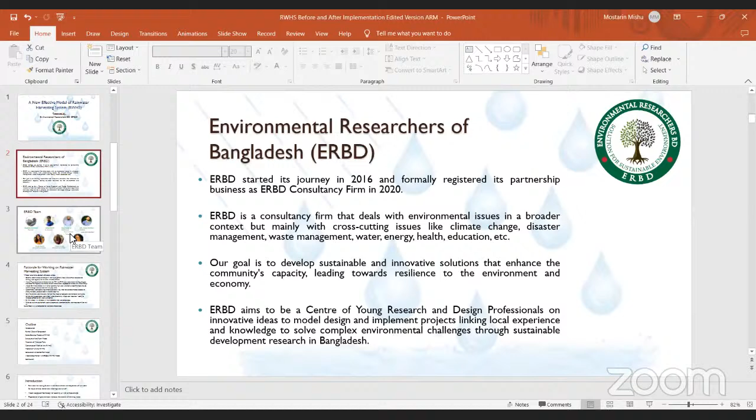We are working with 7 core members here. So if Makam can introduce ourselves, our group members, and say something about the ERBD platform.

Thank you so much, Atik Bhai, for giving me the floor. Good afternoon everyone, this is Makame Mahmood. I'm the founder of Environmental Researchers BD, a knowledge sharing platform and consultancy group. As my colleague Atik Malik Bhai said, we did a rainwater harvesting model with CCDB a few years ago. Apart from that, we have a much bigger network, 3.7K members in our Facebook group, and a global networking chat group where 250 people are connected on this platform, with various professionals from expert level, mid level, and also practitioners connected there. Our website is ongoing, and hopefully we'll launch it in the upcoming year.

And also in our group, we share a lot of insight about environment and climate change. We share articles, blogs, opportunity events, and lots of things. We started our journey in 2016, and during that time we did a few innovative projects.

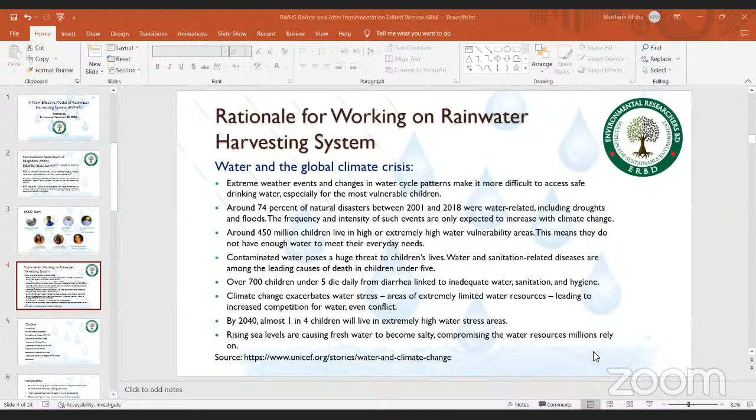Sir, just a moment, can we have it full screen? It's showing like... it's full, it's not full screen yet. Jaman, can you give it full screen and slideshow mode? I think I can also share from my side. Yes, please proceed, Bakam. That will be better. Can everyone see the full screen? Not I yet, I think he doesn't have it yet. Need to stop first. Yeah Jaman, if you can continue. This is nice I guess. Sir, yes, fine, in full screen.

Yes, I'm hearing. Thanks a lot, please, for giving me the opportunity. And I would like to invite all of you in our presentation. I am working as a co-founder of Environmental Researchers BD team, and my name is Jaman Sharif.

So I'm going to explain our model, especially this model, a rainwater harvesting system for multiple uses or multi-purpose uses. We have actually constructed or established several rainwater harvesting models for different purposes, and this was our first work. It was completed in 2016, and because of being a multiple purpose project, it was chosen by one of the leading NGOs, INGOs, CCDB, that means Christian Commission for Development in Bangladesh, and it was established in their climate technology park.

So I would like to first describe a little bit about the rationale for working on the rainwater harvesting system, particularly this model. Actually, we can say water is life, or life is water - water is the most essential part of life and being healthy. Over 700 children under 5 die daily because of diarrhea and cholera-related diseases, that means water-related diseases. In Bangladesh, in the south region, the coastal region, we face a severe drinking water crisis, because most of the water in the coastal region is salty. That's why we came together to establish a model to improve, actually not to create a new idea, but to improve existing ideas.

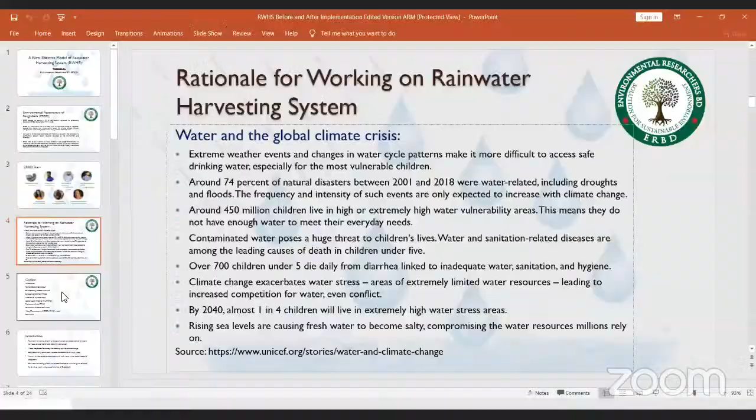I think there's some technical problem. Yes. Okay, yeah, here you go.

So actually, I will cover all these issues in my presentation. At first, some rainfall data, some existing models. I will then describe our model and the filtration materials we are using. I will share some photos of the construction of this model and how it actually works, the mechanism of this model, and some calculations showing how this model will serve the purposes of drinking water and small scale irrigation for a family of 4 to 5 people. Then a video documentary of this model will be presented.

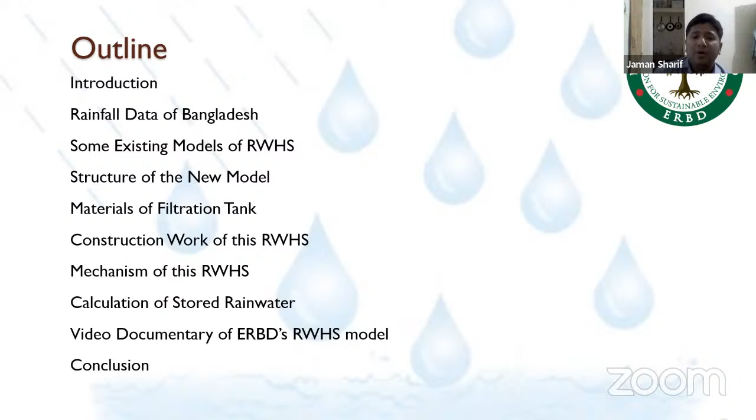Okay, so I have told a little bit about this. Actually, it is rainwater harvesting. We all know about these models. It is the accumulation and deposition of rainwater for reusing it rather than allowing it to run off. That means we store the rainwater and use it for future potable uses like drinking and cooking. This model is especially established for the people of the coastal region of Bangladesh.

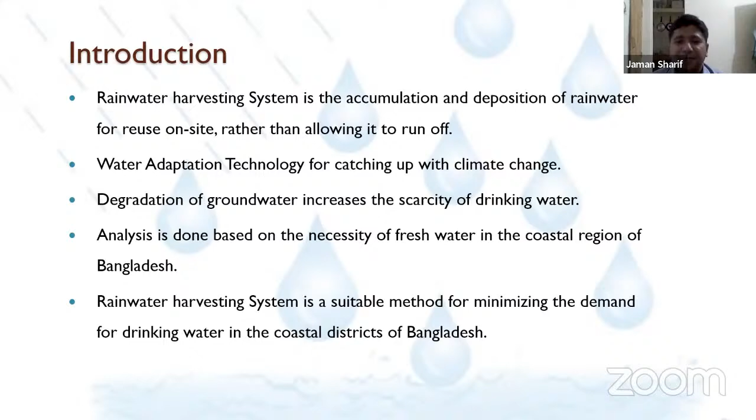Okay, we can go to the next slide. So the rainfall data of Bangladesh shows that the northeastern part, that means the Sylhet region, beside the Meghalaya and Assam region of India, has the highest rainfall, about 5,000 plus millimeters per year.

So in that region, the rainwater harvesting model would not be as effective as it should be in the southern part of Bangladesh, that means in Noakhali, Bagerhat, or Shatkhira regions. And though the Chittagong Hill Tracts regions are beside the coastal regions, due to being highlands and hilly, they have moderate rainfall, more than 3,000 millimeters per year.

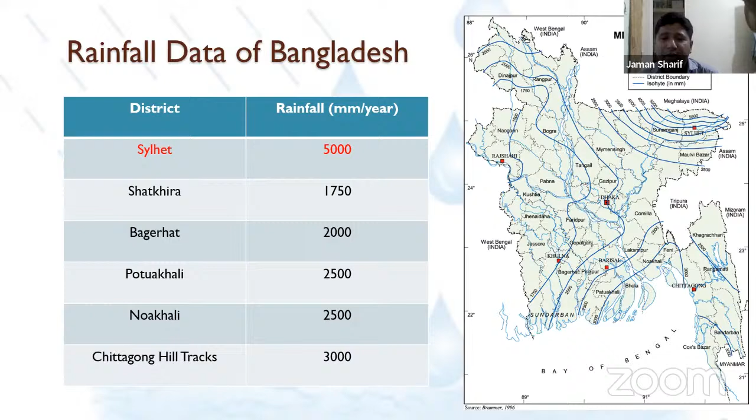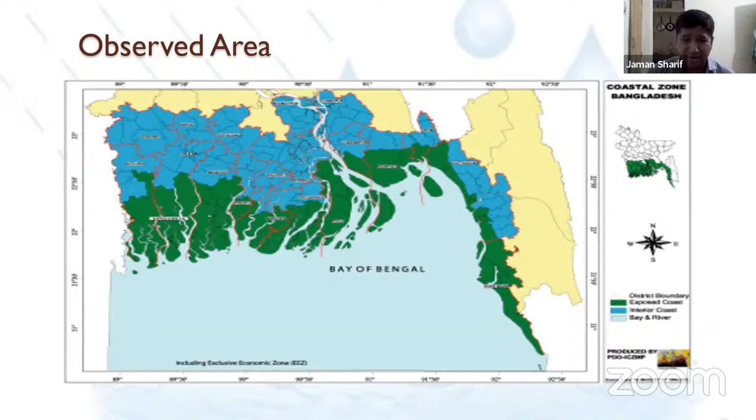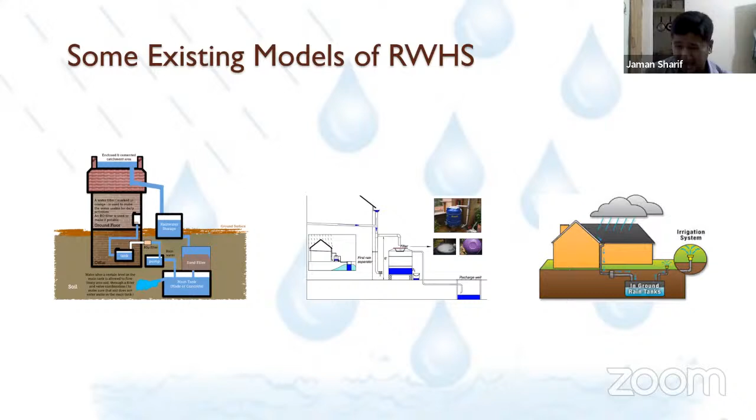In the second model, we can see that the water is being captured through the catchment and stored in a filtration chamber and also in the reserve tank. This is quite a suitable model, and it can be established in Bangladesh as well. In the third model, we can see that this also works in the same way.

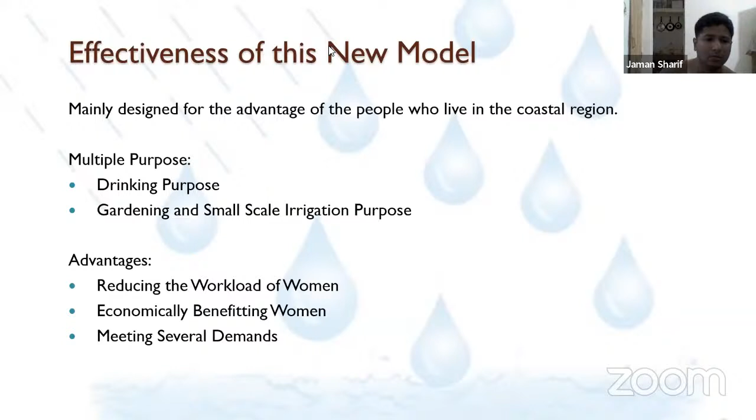We can go forward. Makam, are you there? Hello? Someone carry on. Okay, hello? We can hear you. Please carry on. Okay, okay, go to the next slide.

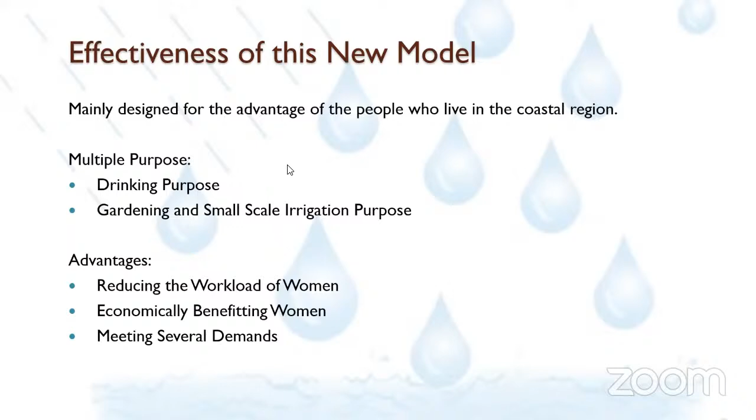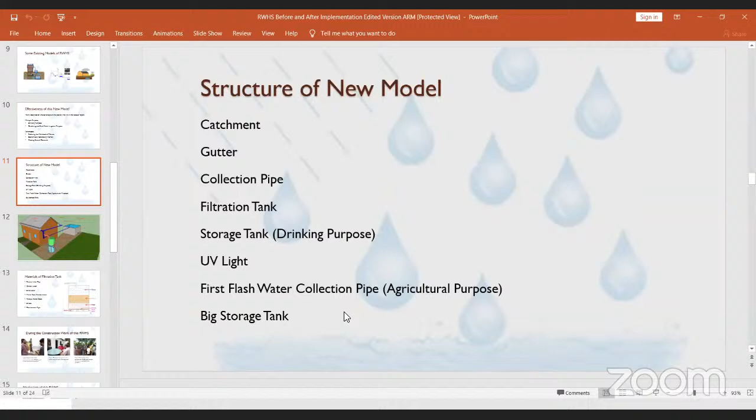Okay, so actually this model has some components: catchment, gutter, collection pipe, filtration tank, storage tank, UV light facility, first flush water collection pipe, and big storage tank.

We can see that the water is captured at first in the catchment area, and through the gutter it comes to the collection pipe, and at first it goes to the filtration tank. After being filtered, it goes to the storage tank, and we can collect the water through taps, and there is also an outlet pipe system. The big storage tank is used for storing rainwater for irrigation purposes. When the water is captured on the catchment and flows through the gutter, it goes to the big storage tank automatically because of gravitational forces.

At the same time, when the pipe toward the big storage tank becomes full, it comes automatically to the filtration tank, and that is how this model works. The capacity of the tank is about 17,000 liters, so in a rainy season we can use it up to 4 times, meaning we can get more than 60,000 liters of water for small scale irrigation purposes, and 5 to 6,000 liters of water for drinking purposes.

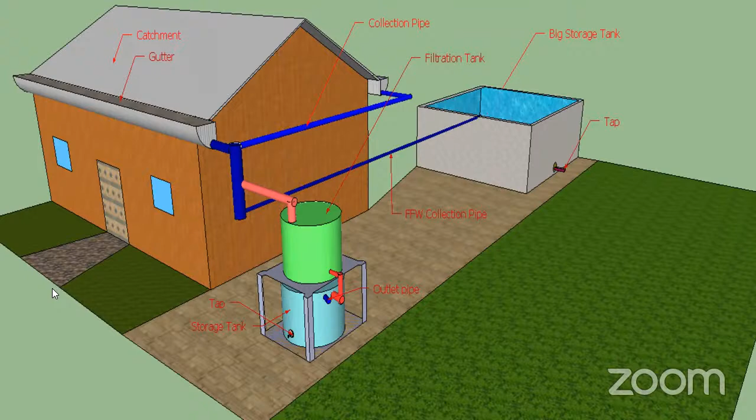Now the mechanism of the filtration tank. In the upper side, you can see the water will come first into the filtration chamber, and we'll use a porous inlet cap so that the water cannot directly come inside the filtration tank. Because we are using gravel or sand layers in this model, a bacterial layer will form here that will consume or eat the organic wastes. That is why it is important to use a porous inlet cap.

We have used traditional filtration materials like gravels and sands here. For supporting the filtration materials, we will use a porous hard sheet. There will be some pores so that the water can pass through, but not the sand. A micro fiber filtrate sheet will be used here to protect the sand from passing through the outlet pipes. And we will use some...

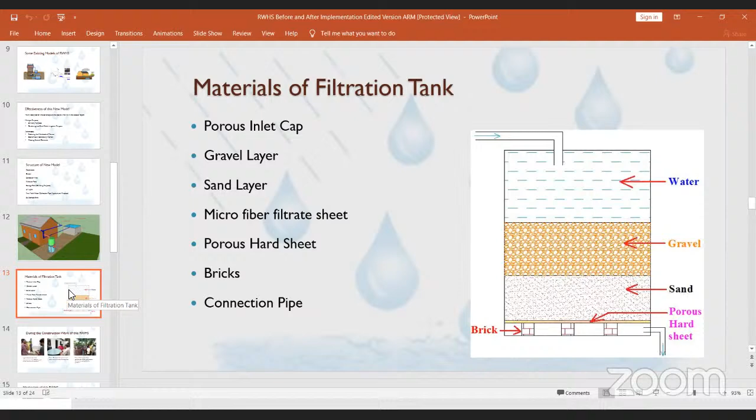Here are some snapshots we took during our construction work. In the second picture, I am explaining that the members are cutting the supporting porous hard sheet. In the third picture, I am explaining to the plumbers about the construction work and the mechanism of how it will work.

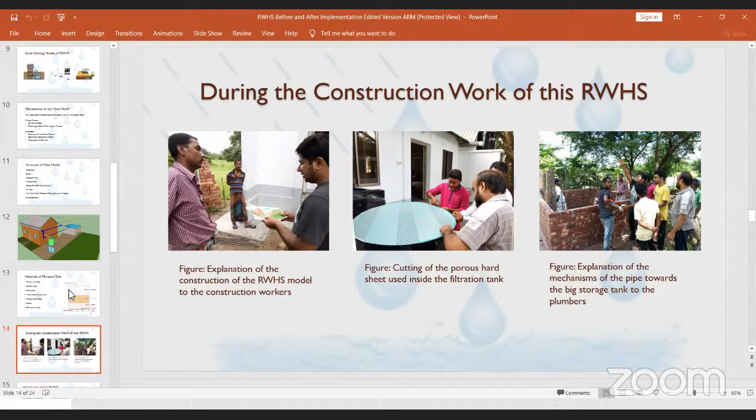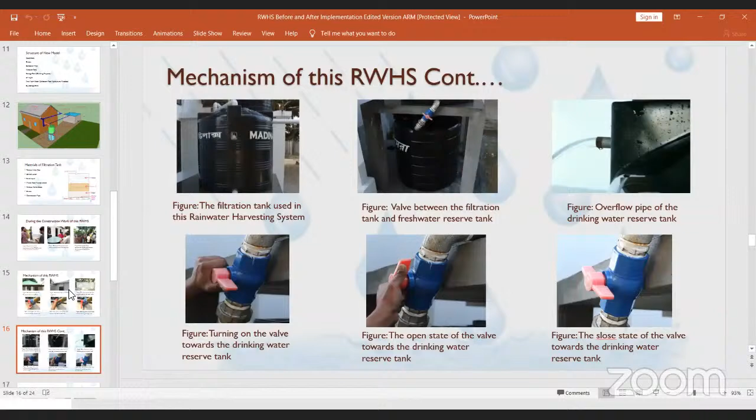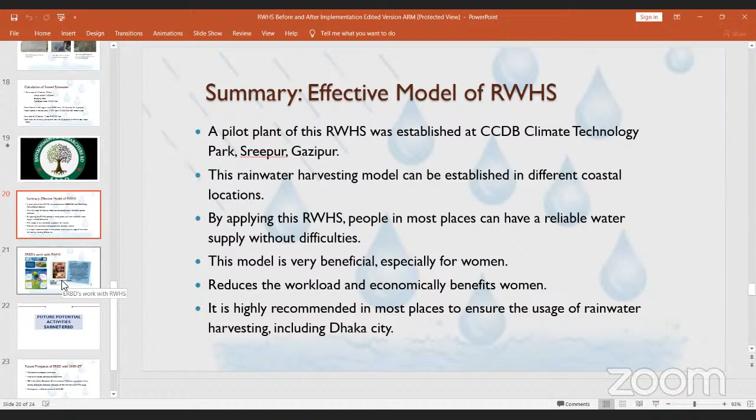This pilot plant was established in the CCDB Climate Technology Park of Sreepur, Gazipur, funded by a German INGO. This rainwater harvesting model can be established in different coastal locations and other areas with drinking water scarcity, like the hill tracts. It can also be used in Southeast Asia or other Asian countries. This model is specially designed for women because it reduces their workload and can be economically beneficial for them. So these were from our side, and we presented a rainwater harvesting model. Thank you, I can carry on from there.

Jaman, I think there are some technical issues. I think this slide Atik Bhai can present. I think Atik Bhai is not available at this moment. I'm not sure, but I think... Hello, Jaman, can you hear me? As he is outside the city and in a very remote area, maybe there are some technical issues. Then Jaman, you carry on, please. Okay, can you please mute? I can carry on here. Okay, Jaman, please mute. Okay. Atik Bhai, please carry on. Atik Bhai, you may carry on. I think they are facing some technical network issue, an internet issue. So let me...

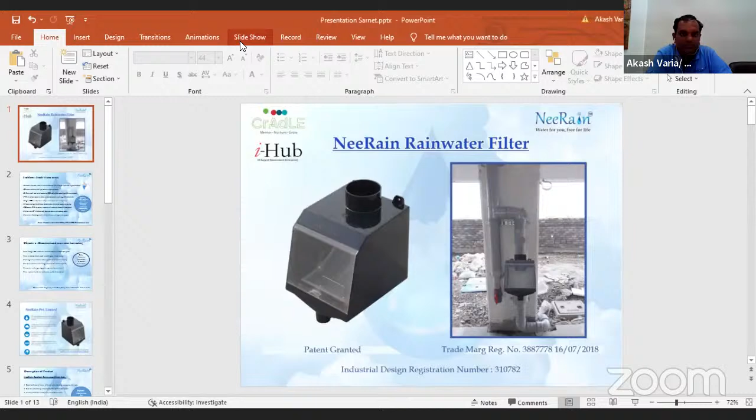Yes, can you make me co-host so that I can share my screen? Dhanushi? Hope you can share. Yes sir, we can see your screen. Yes, yeah sure. Welcome, yes, to Sony. And you can hear also, right? Yes sir, we can hear you well. Yeah, thank you. Should I start? Yes sir, you can start your presentation.

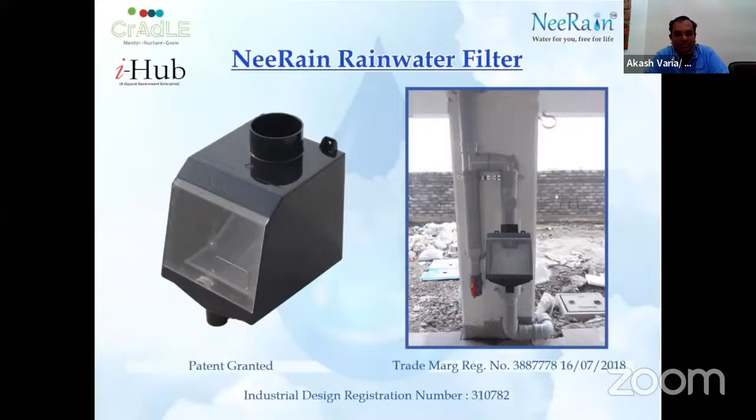Okay, welcome to the world of rainpreneurs from Asia's network. We are all the empowerers and ambassadors of saving the rain, which is the most precious resource of the earth - water. It is our responsibility to ensure no stone is left untouched where we can save rainwater. Let us directly come to the problem of the water crisis in India, as we are based in India. So I will present the data for India.

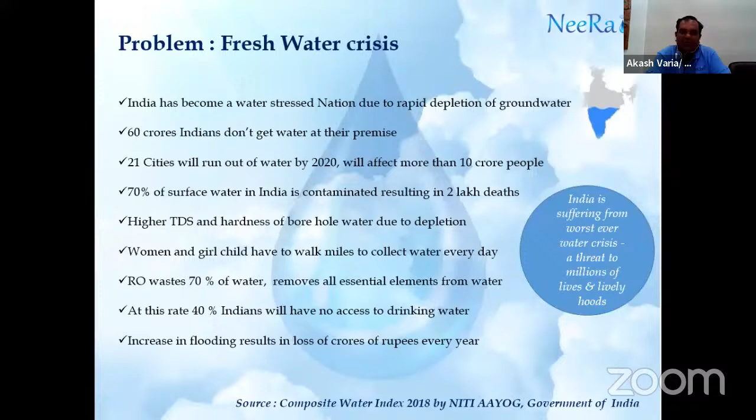Rapidly, it can be said that 60 crores of Indians don't get water in their premises. Even more, like women and children, will face problems in future just because they are not getting fresh water for drinking. Rain is the only solution we have - only rainwater has the answer. Rain brings 450 crores of liters of fresh water to India per year, and each rainfall gives fresh water. Recharge of rainwater solves the problem of water scarcity, and the use of rainwater saves huge amounts of electricity bills. Rain is pure, fresh, and soft with all the vitamins, so we can save the health of children as well as women.

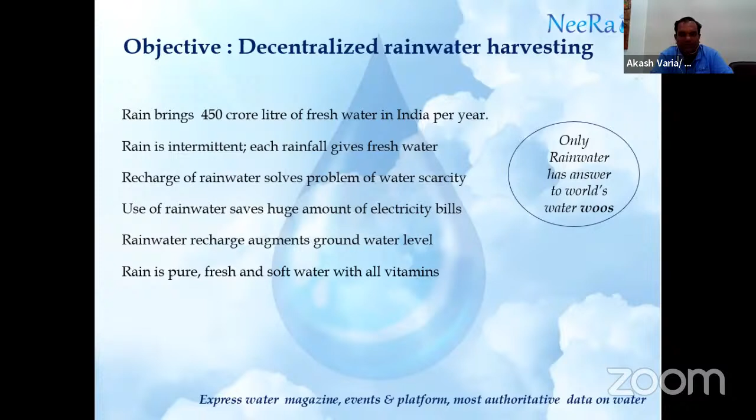So what is the need we found? The meaning of the need is water, and the rain is the water. We founded this in 2018, and the challenge in front of us was that we should provide water security. A common man of India should also be water secure, and they can also use the same rainwater. So we have to make the device as simple as possible, so a common man can also operate it, and cost effective as well.

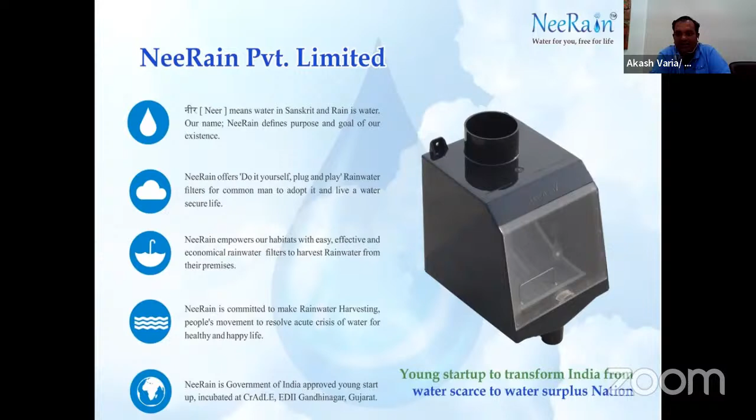So what is the NeeRain rooftop rainwater filter all about? It saves millions of liters of fresh, soft, and pure rainwater over a lifetime. It can be installed by a local plumber within 2 hours. It's truly modular, ready to use, plug and play rainwater filter. It doesn't waste water while harvesting rainwater, doesn't need any manual intervention for saving the rainwater, and has a transparent lid so one can see the rainwater harvesting well. This is the best USP that we have, and it has no moving parts, requires no maintenance, and doesn't need electricity.

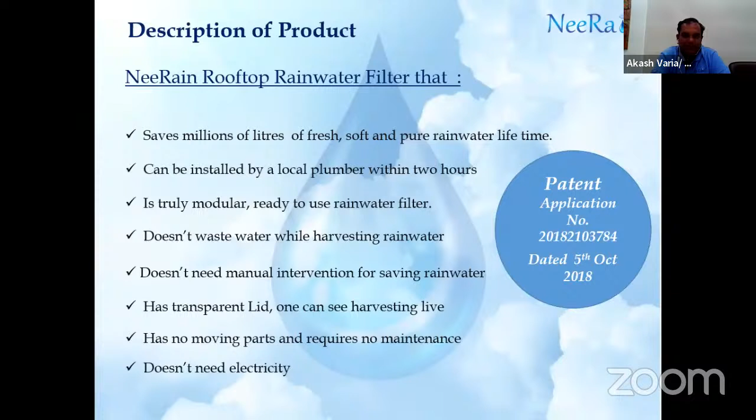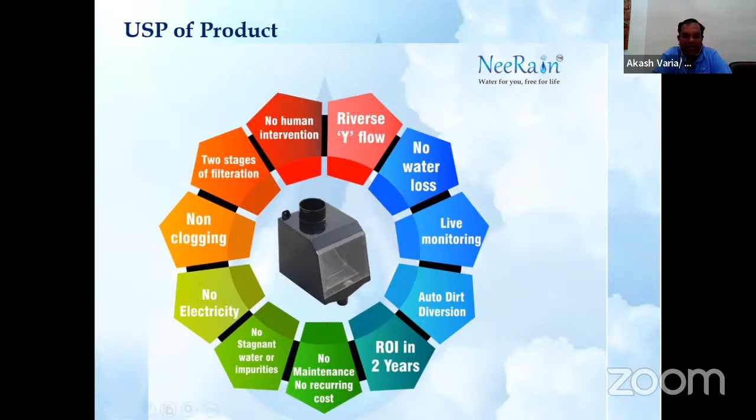So these are the USPs of the product: no intervention needed, reverse Y flow principle, no water loss, live monitoring, auto dirt diversion, no maintenance costs, no stagnant water impurities, no electricity, non-clogging materials, and 2 stages of filtration. So these are all the USPs of our product.

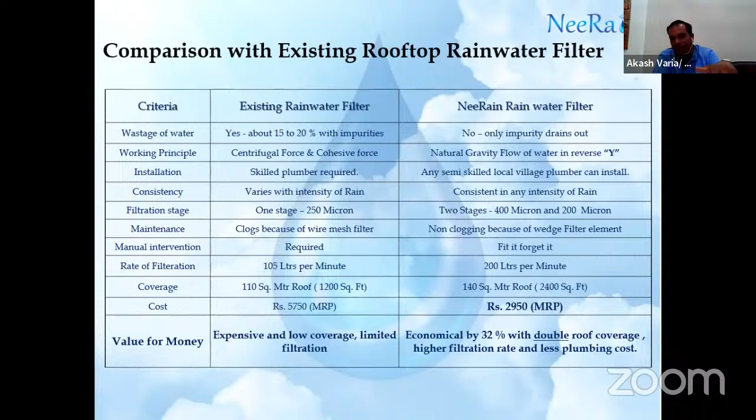NeeRain was awarded as best startup in the Launchpad program by the Vadodara Startup Studio on 15th July 2022. EDII, the Entrepreneurship Development Institute of India, has acknowledged NeeRain as an emerging startup in water conservation on 5th July 2022. An MOU was also signed between the WASH Innovation Hub and NeeRain Private Limited on 6th May 2022 for various technological implementations.

Now, what is the social impact of our work, making India a water surplus nation? Women's empowerment, as they don't have to walk miles for water. Upliftment of kids, as they can attend school instead of fetching water. Water secure life for millions of people in semi-urban and rural areas. Schools and institutions will become free from the tanker mafia.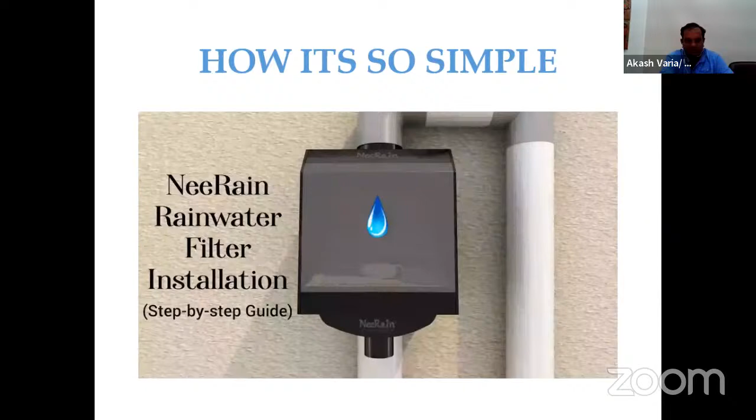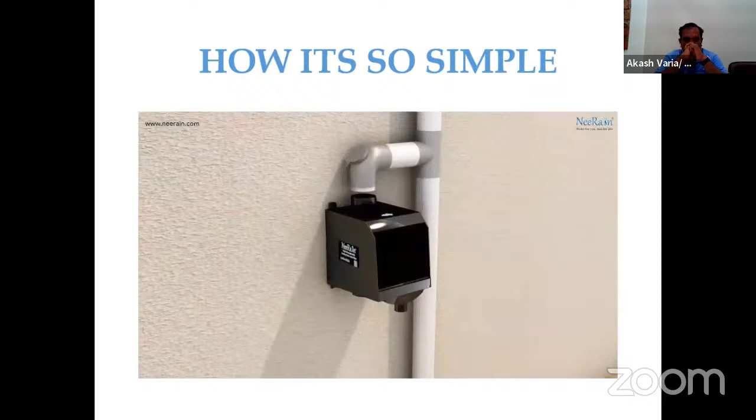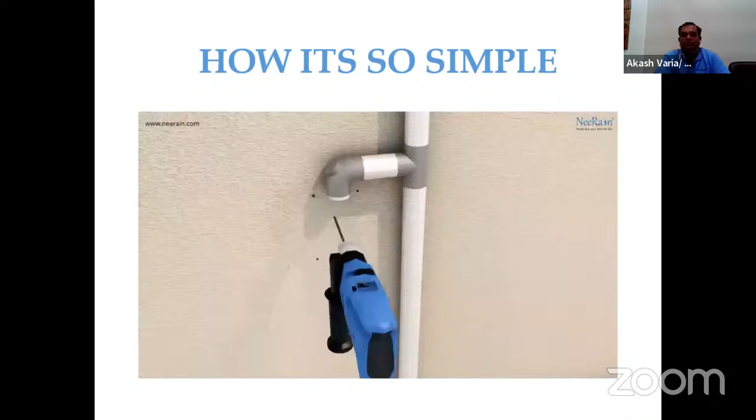Cut the rainwater downtake pipe and fix a T-joint. Fix a flush valve at the end of the pipe from the T-joint. Connect the other end of the T-joint with the inlet of the filter using a pipe. Ensure proper level of the filter using a spirit level. Mark 4 points on the wall and drill holes.

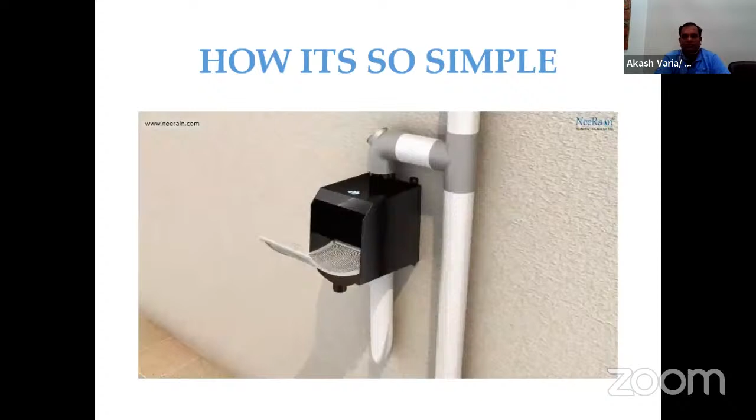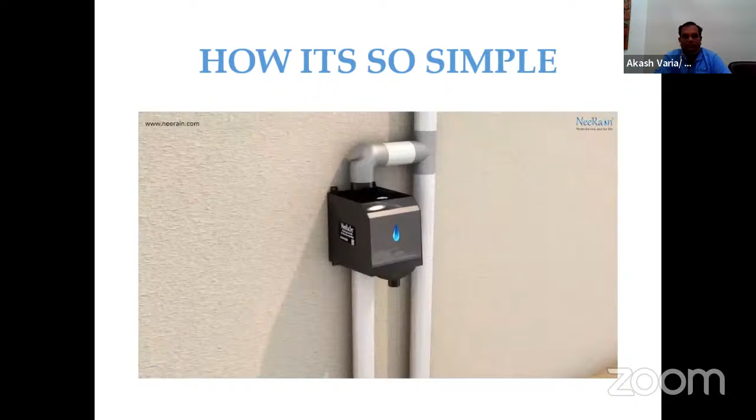Fix the filter using 4 screws. Place filter element 2 in the space of the clean water outlet. Place curved filter element 1 in the unit. Mount the transparent lid on the 2 knobs of the unit. Use a PVC pipe of 4-inch diameter and 6 kg strength to connect the clean water outlet of the filter to the casing pipe of the borewell or tank. Your NeeRain is ready to save fresh rainwater for you.

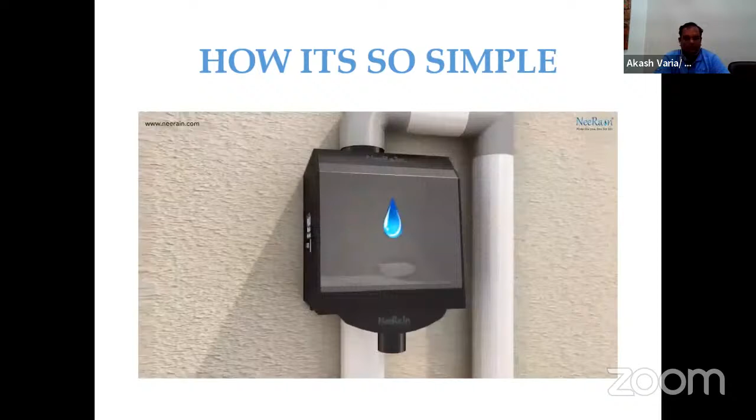So we have already 3,000 plus installations, and you can say that more than 80 to 85 crores of liters of water we have already saved in India. So we have made a huge impact in moving India from a water scarce nation to a water surplus nation.

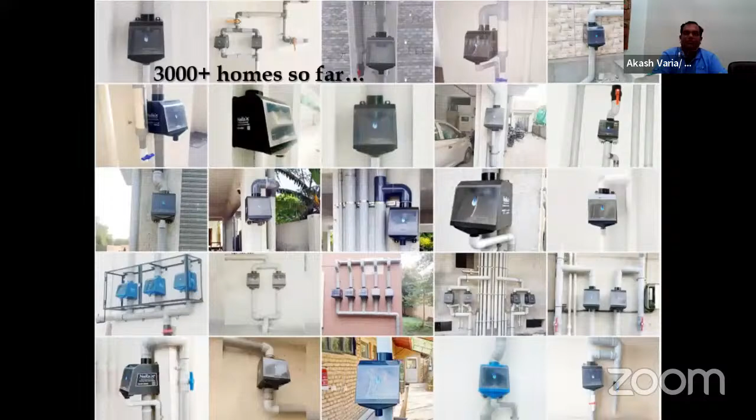At the end, I would like to give all of you one slogan to remember, very common for us as rain ambassadors: We forgot that the source of water is only the rain. We let it go into the drain. If we still don't get trained, then the whole world will have pain.